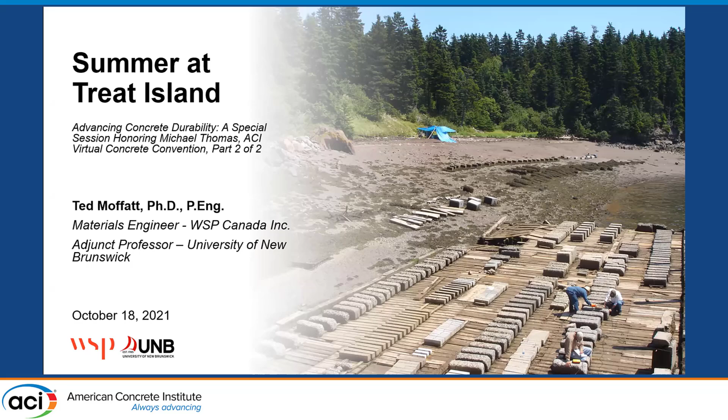I can speak for many former students of Mike's and colleagues now that something all students looked forward to on an annual basis was our trip to Treat Island. If you attended this morning's session and this afternoon's sessions, you'll learn, or would have learned, that Mike certainly made a number of

contributions to our industry. I think concrete exposure sites would certainly be one passion of Mike's, and that hasn't changed between '89 - a picture of Mike there at BRE - and then in 2019, thirty years later, took this picture on our way to Treat Island. What has changed is you can see Mike Thomas wearing a tie here at BRE. I've never seen Mike wear a tie in the past 15 years, but what hasn't changed is certainly his passion for exposure sites, and helping the industry by providing a central database for benchmarking accelerated laboratory test methods, as presented by Benoit and Jason this morning.

Also, validating a lot of this data that Mike's been able to publish over the past two decades has allowed us to validate and calibrate service life prediction models. A lot of this work has also allowed for advancements in standards and specifications. Mike's been heavily involved with CSA here in Canada, ASTM, ACI within the US, and certainly other organizations around the world.

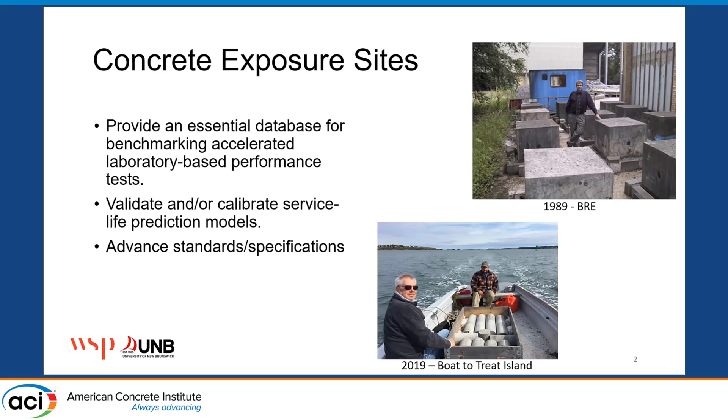Through all this work, we're fortunate now to have concrete exposure sites all over the world. Here I've only shown a few, but it seems that on an annual basis there are new exposure sites popping up all over the world, which is really invaluable and is generating a lot of long-term durability data, which is really needed.

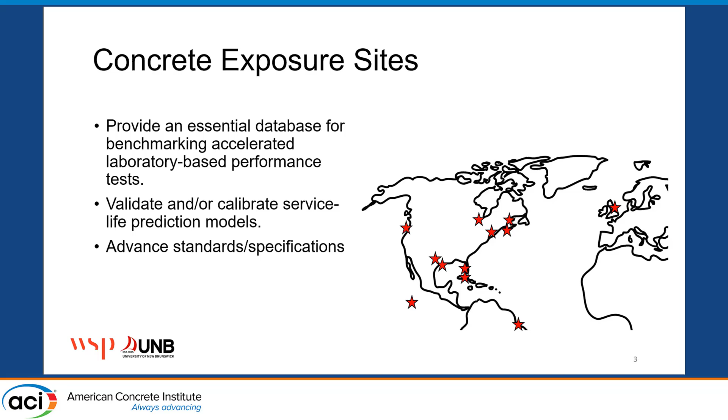As I mentioned, all former students of Mike's at UNB really had some project that dealt with the performance of concrete exposed to harsh marine environments. In order to allow us to study this, we all placed specimens on Treat Island, and the majority of this presentation today will highlight a lot of the work Mike's done for the past two decades, but also a lot of work that's been done on the island in the past eight decades, dating back to the 1930s.

Treat Island, if you've never heard of it, is a world-renowned concrete exposure site. It's located just east of Bangor, Maine, approximately a two-hour drive south of Fredericton, New Brunswick, where Mike is a professor at the University of New Brunswick. It's located off the coast of Eastport, Maine, and has a fairly storied history dating back to the late 1700s.

In the 1930s, it was acquired by the US government for the development of what was known as the Passamaquoddy Bay tidal project. The goal was to construct concrete dams between all of the islands, and this would generate approximately 3 billion kilowatt hours per year due to the tides, which in Passamaquoddy Bay, running in the Bay of Fundy, are world-renowned as the highest tides in the world.

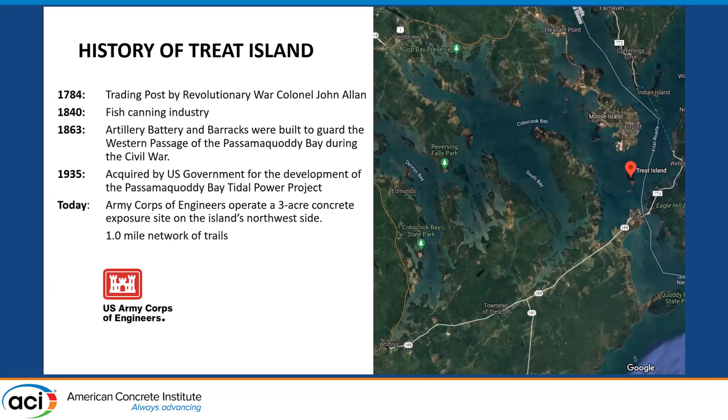Now, a year later, in 1936, this project was scrapped. However, the site to this day remains a concrete exposure site, operated by the US Army Corps. Today, Treat Island attracts concrete nerds like ourselves on an annual basis, but also avid hikers and kayakers.

There's a trail network that runs around the island, and you can faintly see it - one dam that was built as part of the Passamaquoddy Bay tidal project was between Treat Island, which is the large island, and Dudley Island. You can faintly see it between these two islands.

So in 1935, during the development of this project, Treat Island was used as an exposure site to study potential candidate mixtures to be used for the Passamaquoddy Bay tidal project.

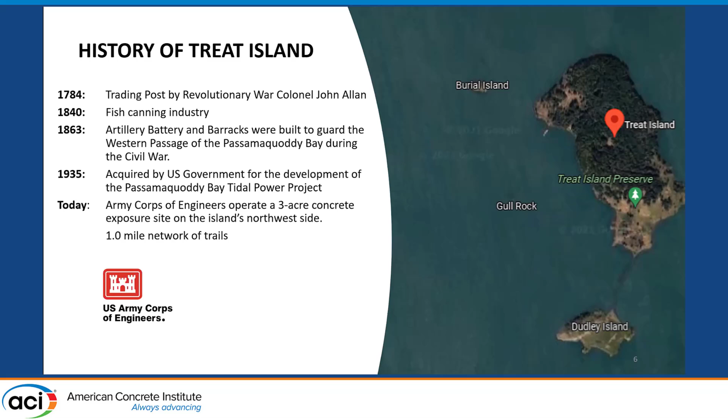However, after this project was scrapped, fortunately it's been sort of maintained for the past 8 decades. Now, on days when we can't access the island...

Passamaquoddy Bay is home to some great deep sea fishing. And certainly after a long day on the island, there's nothing better than some North Atlantic marine lobster and seafood. And the hospitality is second to none if you're ever fortunate enough to be in Eastport or have the opportunity to visit the island.

Now, Treat Island, as the name implies, is an island. The only way to access the island is by boat, and Captain Butch Harris and his father have been taking researchers out to the island for the past 50 plus years, and he seems to have a boat for the job. Picture here of Mike in 2019 when we delivered some cylinders to the island.

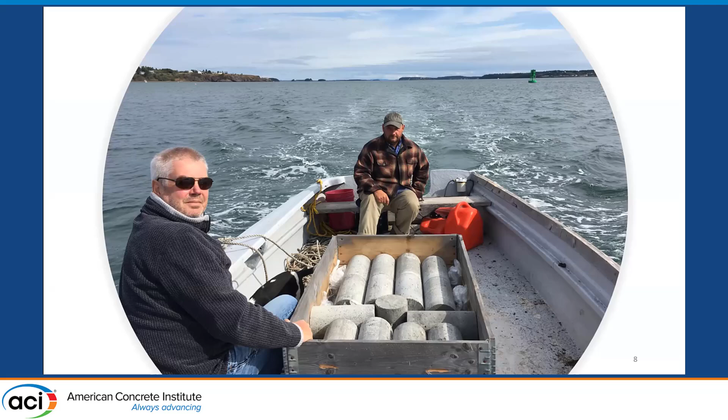Now, if you haven't seen pictures of Treat Island, 15 to 20 years ago, it looked like this. Unfortunately, I'll show you a few pictures in a few slides. Unfortunately, it's not as pretty these days. However, a significant amount of research now is mostly done on the beach and a section of this mid-tide wharf as well.

So Treat Island is known as a very harsh marine environment. It's exposed to the highest tides in the world, ranging anywhere from 20 to 25 feet, moving this elevation every 6 hours. It's a very harsh marine environment, depending on where concrete blocks are located on the island. It's exposed to 100 to 160 freeze-thaw cycles per year. Water temperature is maintained around 5 degrees Celsius. So other than freeze-thaw and chloride ingress, concrete's exposed to wet-dry cycles, abrasion, erosion, chemical attack by marine salts.

Pictured here at low tide, as the tide increases, you can see this is a slightly rainy day, but these mid-tide specimens have been submerged, and the tide will continue to rise upwards towards the bottom of this blue tarp. Unfortunately, the mid-tide wharf has seen better days, but fortunately, a lot of these specimens at the tide wharf have been retrieved, and a lot of durability data has been published.

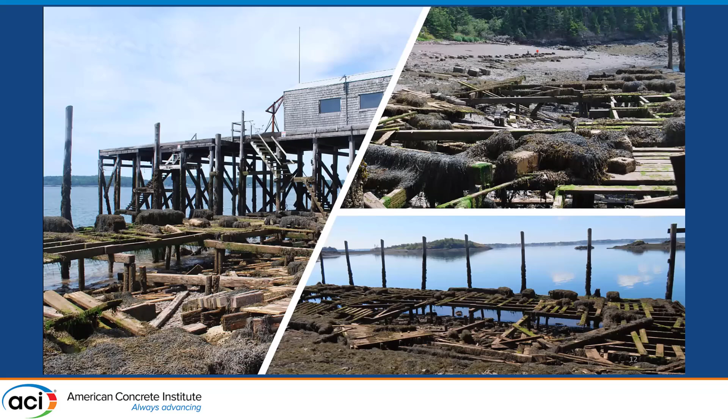This is sort of pictures of what the mid-tide wharf does look like now. Fortunately, however, a lot of work is being done on the beach, as you can see in the top right hand of your screen. Unfortunately, there is, though, a large section adjacent to this deteriorated wharf, which is home to a lot of specimens.

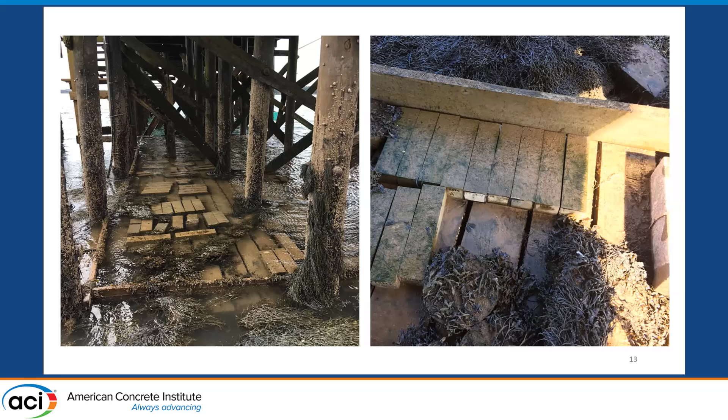So I'd like to briefly touch upon a lot of the research happening on Treat Island that happened over the past 8 decades, but also a lot of research that Mike has been involved with lately. So certainly 8 decades, as you can imagine, a number of researchers looking at a number of parameters. Here I've listed just a few of them.

Certainly a large part of Mike's contribution to Treat Island has been looking at the effect of SCMs and ASR, and I'll be briefly touching upon those in this presentation.

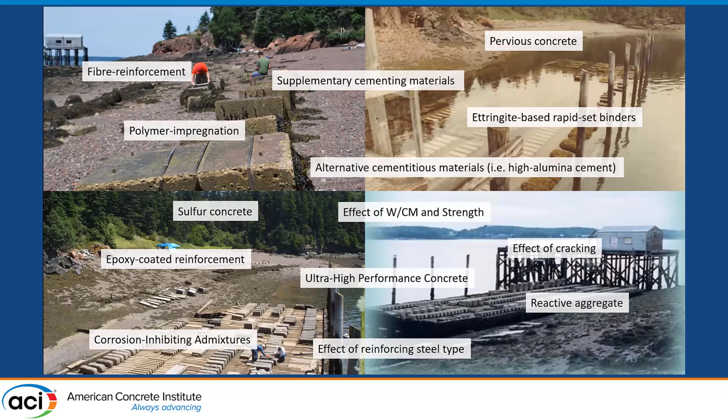To give you an example of how harsh an environment this is, if you've seen Mike give a presentation on Treat Island in the past, he's much funnier at explaining these pictures than I am, but I'll try to do my best. Pervious concrete, probably heard of it, pervious or permeable concrete. When it rains, it drains. These are specimens that were placed in 2006.

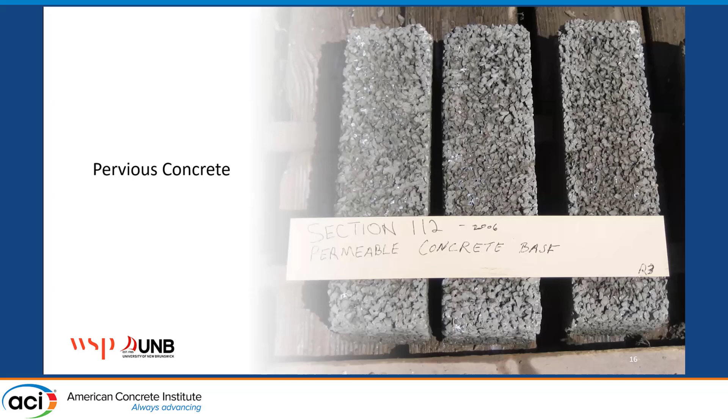So these are fairly large prisms, 6 by 6 by 21 inch prisms. They're not just going to float away. In 2007, upon revisiting the island, really there was nothing left of them. All that was left was this sort of 1 or 2 inch small little specimen. So makes you rethink whether or not you want to use pervious concrete in harsh marine environments exposed to freeze-thaw.

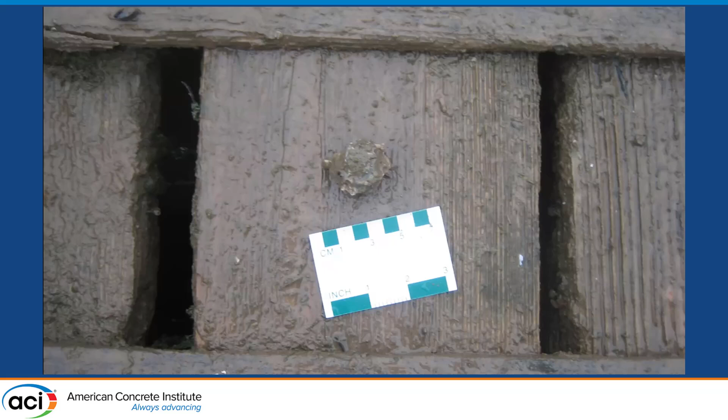In 2003, Mike led an initiative to retrieve a lot of these specimens and study the durability performance of a number of them following 25 years. Before I get to that, I'll talk about some other research Mike's been involved with on Treat Island.

Certainly, as discussed this morning, a lot of work on ASR. To date, there's been 4 series of research blocks placed on the island. In '94, 12 blocks looked at the effect of more or less supplementary cementing materials. In 2018, we retrieved 6 of those blocks, and that work is underway to publish those results hopefully shortly.

Three other projects or phases resulted in blocks being placed in 2003, 2006, and 2016. These are really part of greater research programs where specimens were placed at Treat Island, the CANMET Exposure Site in Ottawa, Ontario, as well as University of Texas in Austin.

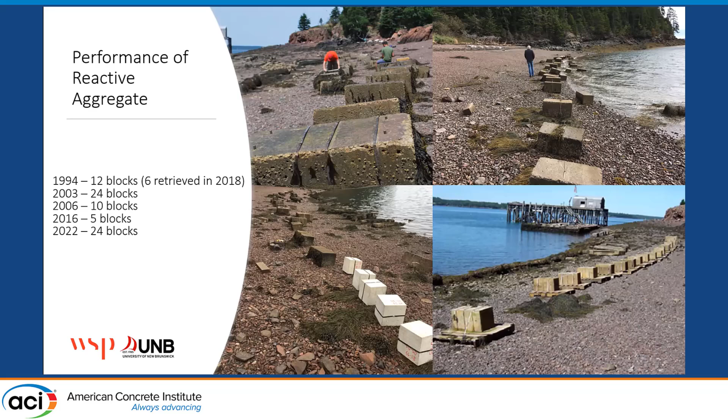So I won't be showing any expansion data, but one of the questions raised this morning was what's the effect of freeze-thaw and ASR. The picture isn't too big, but this little piece here is more or less the size of a bowling ball, and this is just the effect.

This is a control mixture without SCMs, and it more or less shows the effect of freeze-thaw and ASR. This bowling-ball-shaped specimen used to be the size of a regular block. However, as a result of ASR and freeze-thaw, 15 to 20 years later, it's more or less disintegrated.

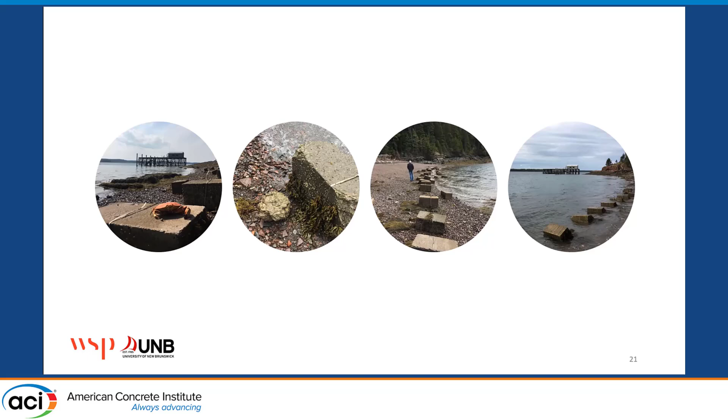So as with all specimens placed on Treat Island and certainly exposure sites around the world, all these specimens are embedded with steel gauges, or embedded pins, which allow for expansion measurements to take place annually using a DEMEC gauge. Jason Heidecker here on the left with Rachel Lute conducting annual expansion measurements.

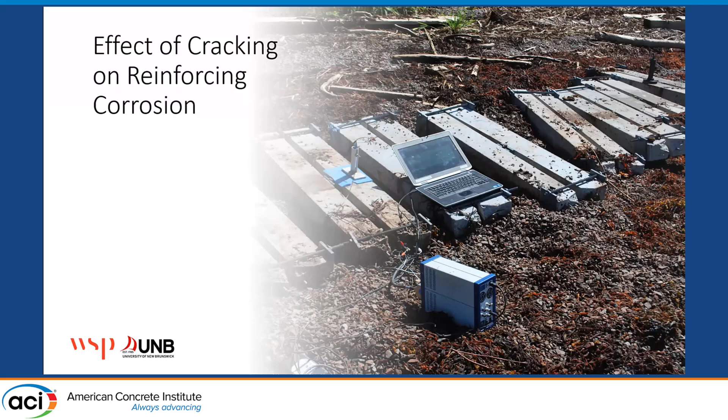Other work that's happened on the site includes the effect of cracking on corrosion. These specimens are placed at the high tide level in order to promote the presence of oxygen and moisture, constituents needed to initiate corrosion.

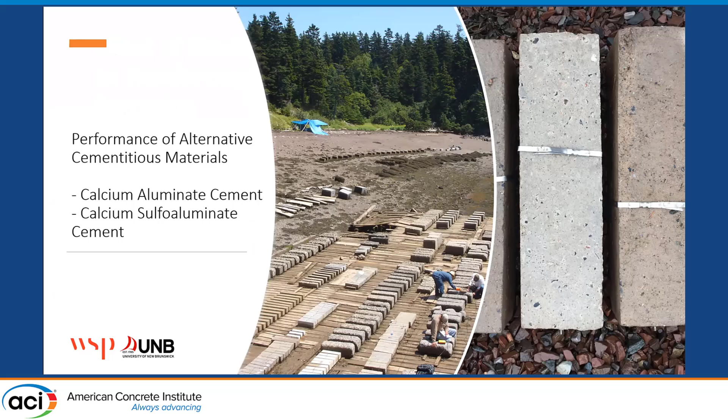A lot of work's being done on alternative cementitious materials, so the performance of calcium aluminate cement or calcium sulfoaluminate cement, or ettringite-based binders containing calcium aluminate cement, Portland cement, and calcium sulfate, primarily looking at the durability performance of these specimens. There's also a lot of reference blocks that have been placed on Treat Island over the years.

In 1997, the Hibernia oil platform, an offshore oil rig located approximately 200 miles off the coast of Newfoundland. At the time it was placed, reference blocks, more or less the size of your fridge, were placed on Treat Island, and a large coring program has taken place over the years.

So this is what they call modified normal density concrete. The aggregate was partially replaced with Solite, so an expanded slate lightweight aggregate.

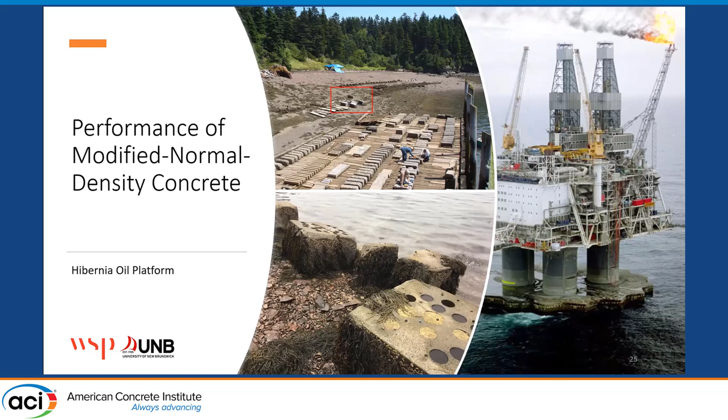Just recently, the Hebron oil platform, again another gravity-based oil platform, was put into service around 2018, 2019. And at the time, again, a number of large reference blocks were placed on Treat Island. In this case, they were placed at the high tide, mid tide, and fully submerged below low tide.

No coring has taken place, as they were only placed approximately 2 or 3 years ago. However, they will be cored in the future to determine the performance of these binders.

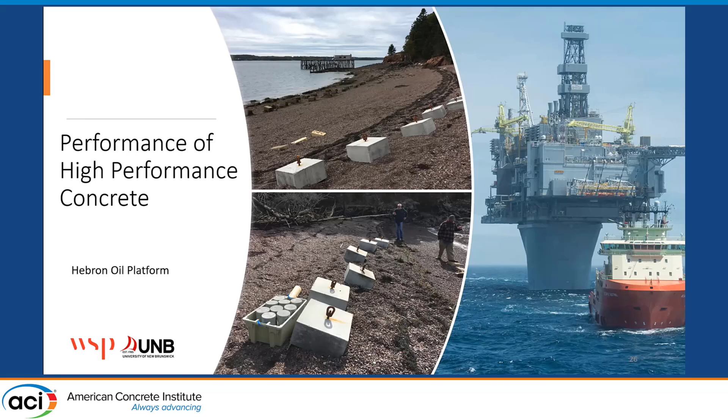There's also been a lot of work on ultra high performance concrete. This is some of the work dating back to specimens originally placed by the US Army Corps and then by Mike Thomas in 2006. This work was just published last year, which I'll briefly touch upon at the end of the presentation. It's looking at the durability performance of UHPC exposed to such an environment after approximately 20 years.

A lot of work has been done by the US Army Corps, which operates the site, Georgia Tech, and University of Maine.

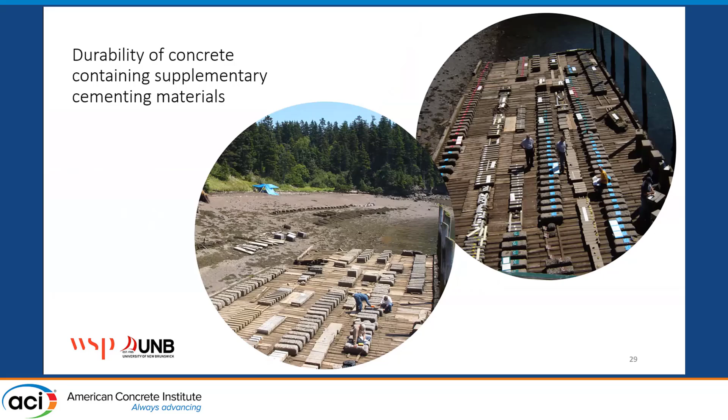What I'd like to briefly touch upon is the durability performance of concrete containing supplementary cementing materials. A fairly large research program was initiated in '78, resulting in the placement of approximately 350 concrete specimens, looking primarily at the effect of supplementary cementing materials in mitigating chloride penetration, but more or less durability as a whole. A number of parameters were studied: SCM type, replacement level, water-cementing ratio, fiber content or fiber type, reinforcement type, all at a fairly constant cement content.

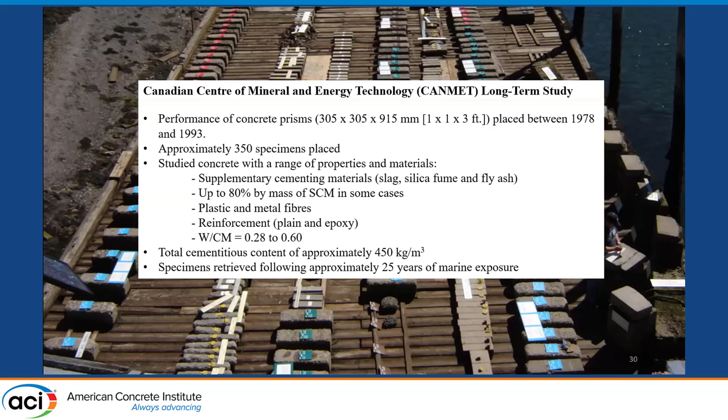The research program more or less looked like this, ranging from visual observation to studying both the mechanical and durability properties of these binders. This resulted in removing the specimens as pictured in the top left.

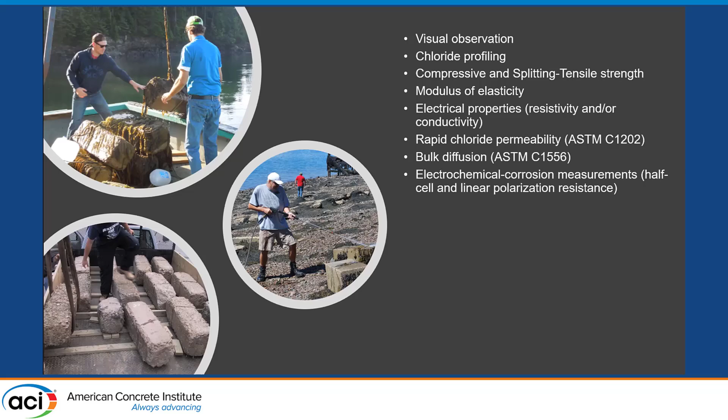This is the most work I've ever seen Mike do on Treat Island. This is Mike with a pressure washer cleaning off specimens to do a visual observation before returning them to UNB. Out of all this, Mike's been part of a significant amount of literature based on not only this project, but a lot of other work on Treat Island.

Treat Island was featured on the cover of Concrete International in 2011.

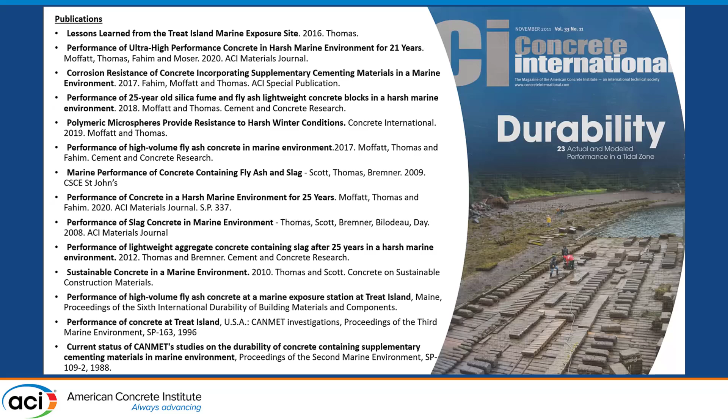To briefly summarize some of these results, if we look at phase one for example, it looked at a range of water-cementitious ratios and SCMs.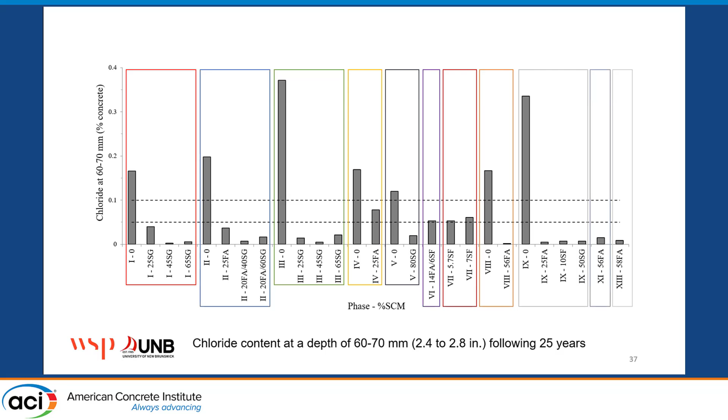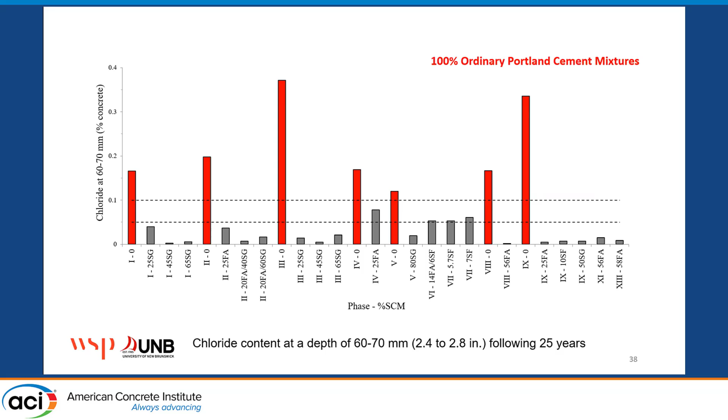If we only look at the controls, that is 100% Portland cement, we can see that chloride concentration at this depth is in the range of 0.1 to 0.4%. This is well above the typical chloride threshold of 0.05 to 0.1%, which is commonly used in the literature as the concentration of chlorides needed to initiate corrosion. So although it's been shown elsewhere that reducing the water-cementitious ratio increases the resistance to chlorides, the effect is really small when compared to using SCMs.

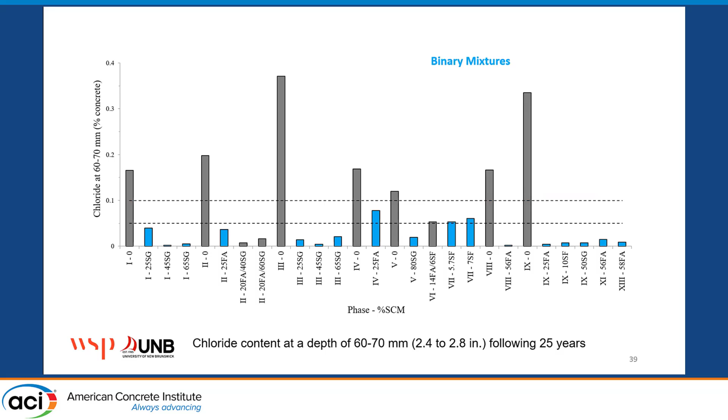If we look at binary systems, this is all data from blocks following 25 years of exposure at Treat Island, we can see the concentration is much lower. The majority of mixtures fall below a threshold of 0.05. And if we look at ternary binders, again there's a marked reduction in chloride penetration at this depth.

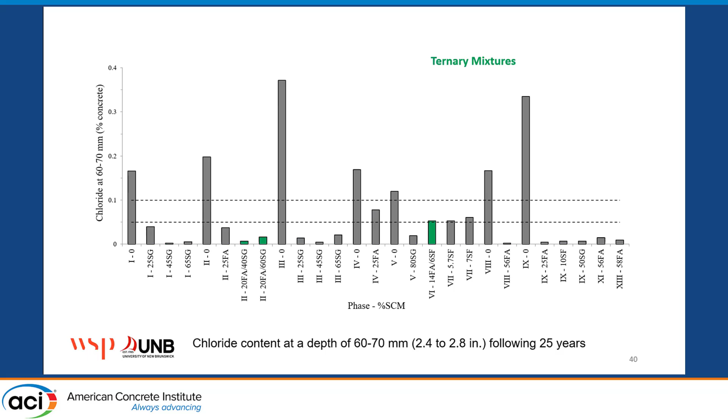So really this long-term data is really invaluable, highlights perhaps some of the deficiencies of current specifications and perhaps the need for performance-based specifications.

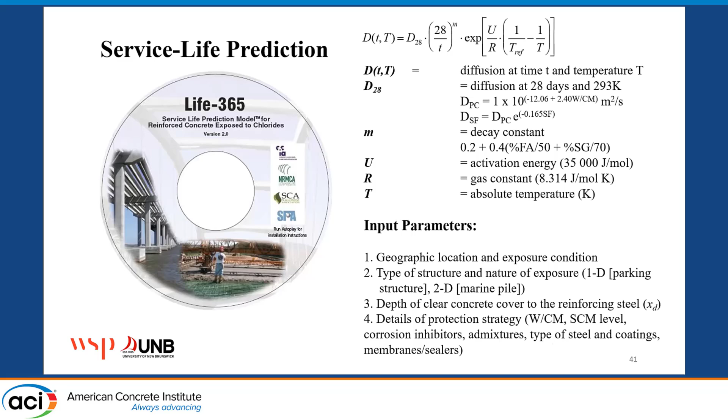So switching gears, let's briefly talk about documents this morning. Mentioned Life 365, a service life prediction model developed around 2000 by Bentz and Thomas. This model is certainly still used to this day, and a lot of this data that's generated on Treat Island, but also other exposure sites, is really invaluable in validating or calibrating models like Life 365, amongst others. If we look at phase 9, this is a 0.5 water-cementitious ratio, with various levels of fly ash, slag, and silica fume.

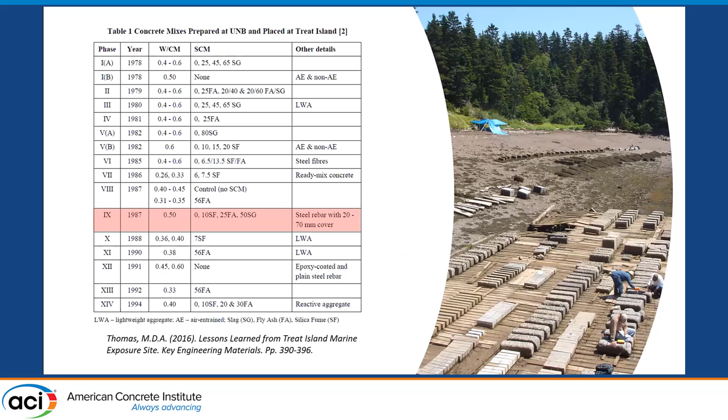Again, after 25 years, we see a marked reduction in chloride penetration relative to depth. So sorry for no colors here, but this is the control, 100% Portland cement, with concentration well above 0.05 at a depth of 140 mil, compared to mixtures containing SCMs, which is significantly reduced.

So assuming Life 365 typically assumes a surface concentration of 0.8. However, in this case it was reduced to 0.5, and the lower concentration in this case was assumed to be due to relatively low paste content within these mixtures, and perhaps loss of paste at the surface during exposure.

So generally, I think you can agree that the model does a reasonably good job at predicting the penetration relative to depth when compared to the existing chloride profiles, but this is certainly knowing or assuming the surface concentration in this case.

However, in marine environments this is really not always the case, or really can never truly be known, as it depends on a number of factors: cement content, type and level of SCM replacement, exposure conditions, loss of surface to salt scaling, chloride binding, leaching, etc. However, assuming a surface concentration of 0.5 in this case, Life 365 does a reasonable job at determining chloride penetration.

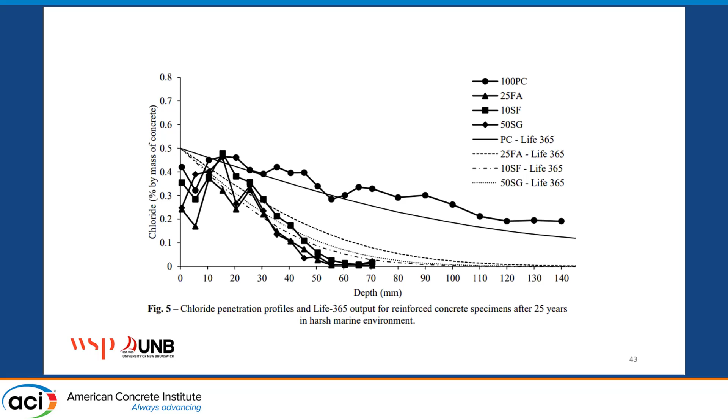Just in closing, I'll highlight a few results. This is work that was published last year in ACI Materials. It's perhaps one of the longest running durability projects on UHPC, especially for UHPC specimens placed on a concrete exposure site.

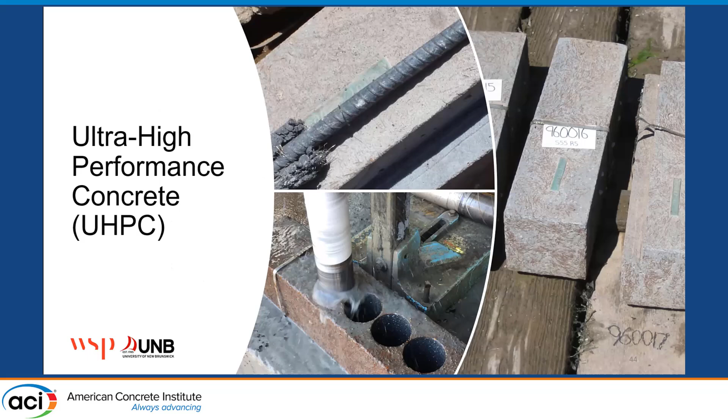This work highlights a series of specimens that were placed on Treat Island, dating back to '95, concrete produced by Walley and Neely from ERDC, all the way up to 2004 when Mike placed specimens. So certainly slightly modified mix designs, however you can see negligible expansion between 5 and 21 years.

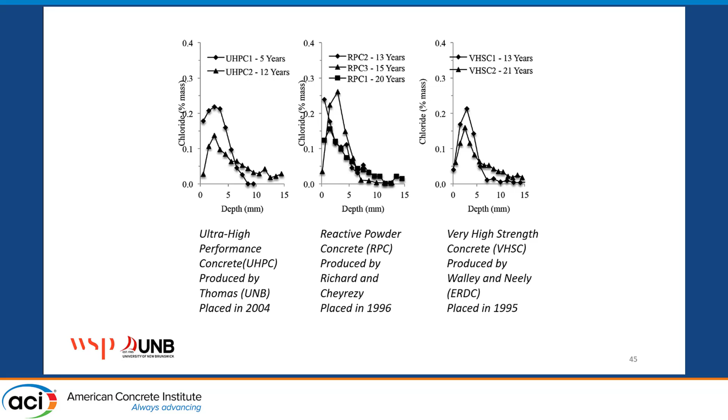So again, these are all specimens placed at the mid-tide level. And if we look anywhere from 5 to 21 years, we're not seeing penetration really deeper than 10 to 15 millimeters. And if we group these together and compare them to high performance concrete, which is arguably a very good concrete mixture, we can see a marked reduction in chloride penetration.

So Mike proposes this theory that perhaps UHPC has a disconnected porosity, which results in no increase in expansion from 5 to 21 years in a lot of these binders. And sorry for the small picture, but in this case, this is just an example to show the negligible penetration of chlorides.

In some of the specimens that were from the RPC series placed in '96, they were reinforced just to more or less show the effect of low cover on maintaining steel in a passive condition. So in this case, steel was embedded under only 10 millimeters. Certainly in a conventional Portland cement based binder, this would certainly corrode in this period of time. But after 13 years at a cover of 10 mil, no signs of corrosion were observed on this steel.

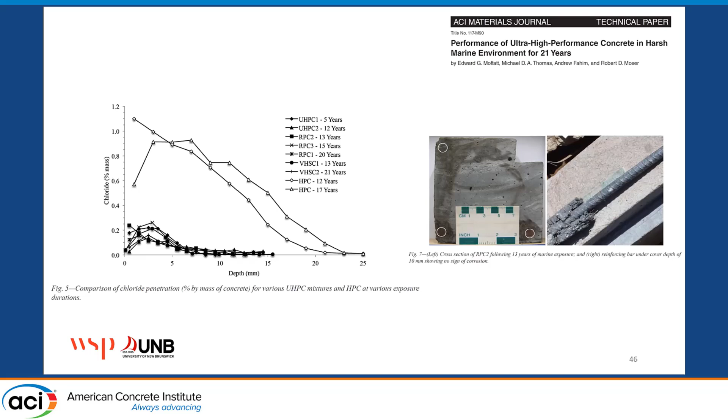And all this work is published in ACI Materials. So in closing, certainly...

Treat Island, amongst other exposure sites, and certainly the work that Mike has brought to the industry over the past two decades, has really been invaluable. There are certainly a number of lessons that can be learned from Treat Island and concrete needed to withstand the harsh North Atlantic environment found there. Certainly incorporation of SCMs is needed at sufficient levels. Certainly the use of stainless steel is an option, and UHPC has been found to perform very well. And then finally, service life prediction models such as Life 365, amongst others, can to a reasonable degree predict chloride penetration.

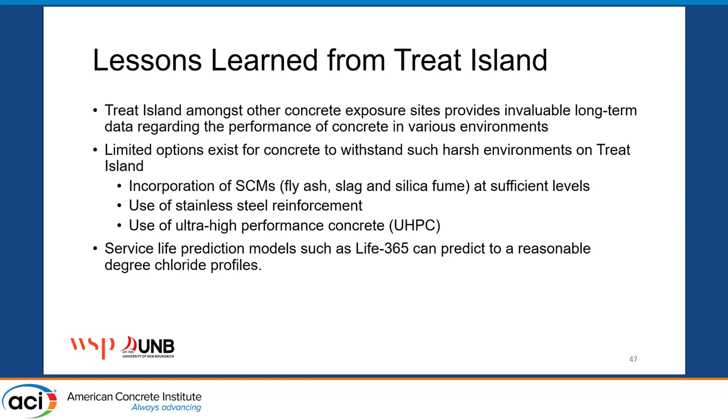I'd like to thank you very much and close off with just a few pictures over the years. And as Michelle mentioned this morning, certainly Mike, thanks very much for everything.